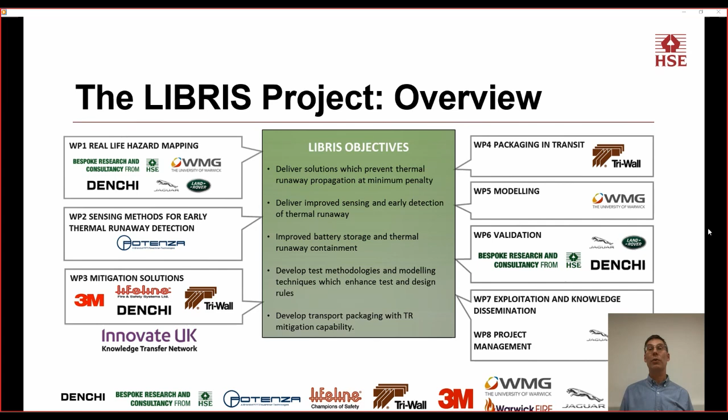And this all involved using the facilities and the skills that we have up here in Buxton, based on our large site, to do abuse testing of batteries. Now, abuse testing is where we're taking them beyond, in some way, what the manufacturer says that they are safe to do. So we're seeing what happens when you push those boundaries.

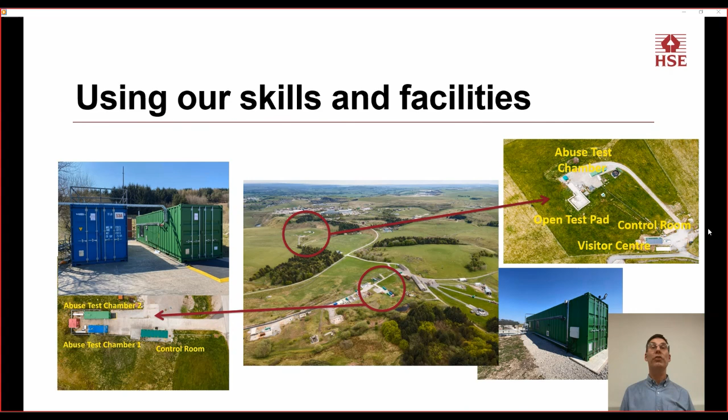So one example of the work we did within that project with a partner is with Tri-Wall, and Tri-Wall make packaging solutions, and they developed a battery packaging solution within the UK, and we did the testing of that, filling it up with batteries, setting the batteries in the appropriate way so they were going to fail, and showing that the packaging contained that event adequately.

Another example is working with Jaguar Land Rover as one of the vehicle manufacturers and designers in the UK. Now, nowadays with an electric vehicle, you do a test where you have to fail one of the cells in the vehicle and show what happens, show how the event is being controlled. And vehicle OEMs are working hard to control those events and to minimize the output and to stop it as early as they can.

So like all other partners, Jaguar Land Rover were working on that. They were developing some solutions. We were doing the testing of that to show that their solutions were making a real difference. And I haven't got time to go into the details of that, but yes, they did.

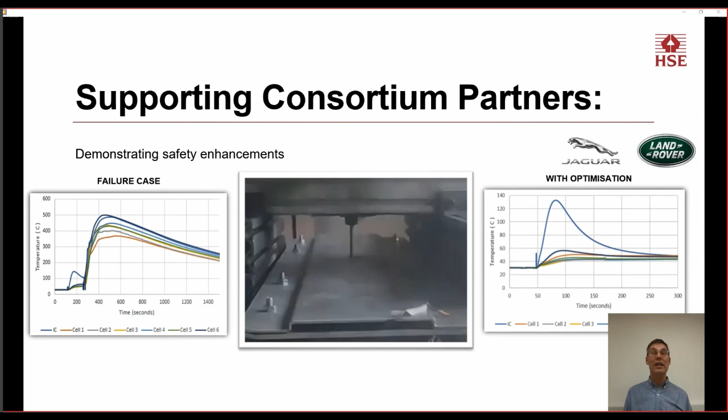And another example is looking at the data needed to do computational modeling. The modeling is only ever going to be as good as the data that feeds it, that generates it. So we were generating a lot of data and feeding that to a partner within the consortium who was doing that modeling. And there's just a few papers that come out of that.

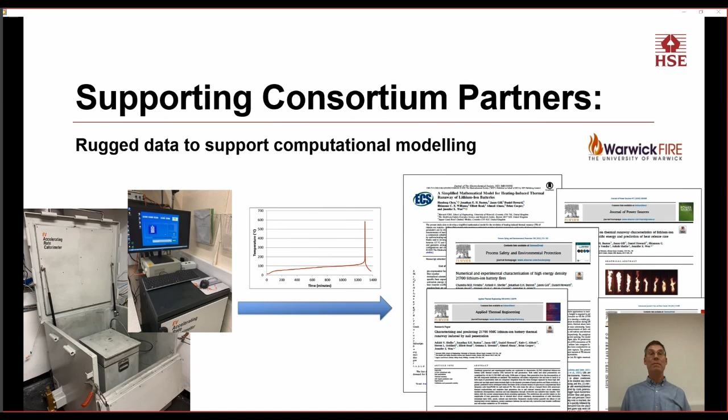Now, in addition to that work, we were doing some research that we were driving. One strand of that was looking at the gas coming off cells when they fail. So you see on the side of the picture there the rig in which we're generating that gas. That's a sealed system, and it's a system we could fill either with air or with nitrogen.

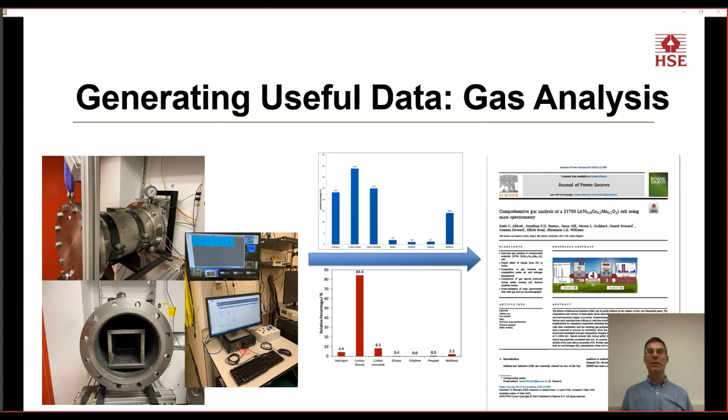So we're setting up and doing 2 sets of tests for everything, and you see the results in red there show you get one set of gas composition coming out when you run in air, and the results above in blue show you get a different set of gas composition coming out when you suppress the ability for the thing to catch fire. So those results have been put out, and if you're interested, you can find them in the paper that's referenced in the Science Review.

And another little bit of work we did looked at some of the projectiles that come out, and we'd noticed that on occasions when cells fail, or we caused cells to fail, they could fly off. That's an uncommon thing, but when they did, it could be quite vigorous. So we followed that through, and here's an example of what that looks like.

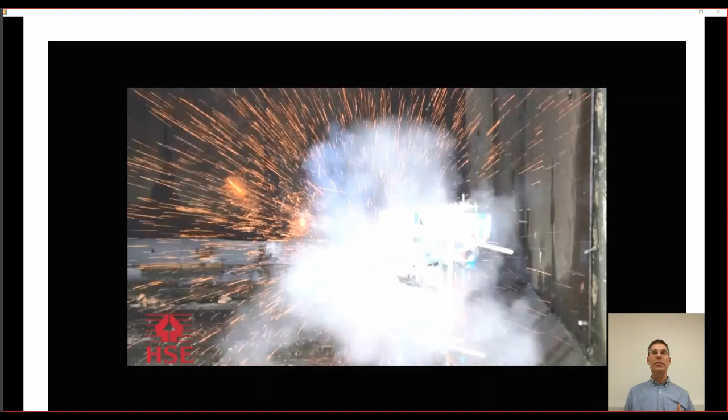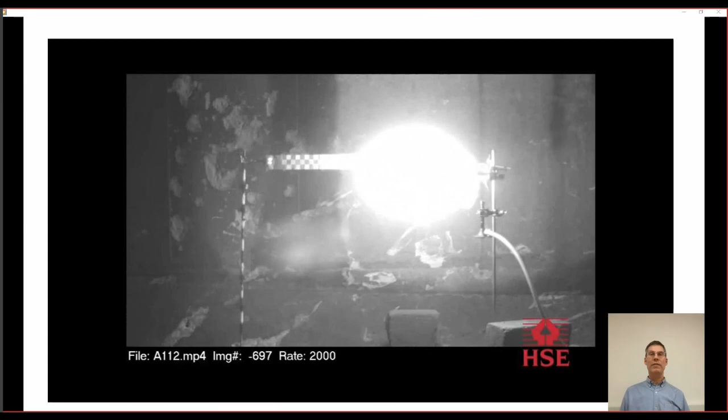Now we're deliberately putting the cell in a flame and holding it in a way that maximizes the chance of it flying, and showing that as a high-speed side-on image now. So this is a slow motion of the event that you've just seen, and you can see that the cell spins off on its axis. It's a bit like a Catherine wheel as it flies, and eventually hits the far end of the bunker and crumples.

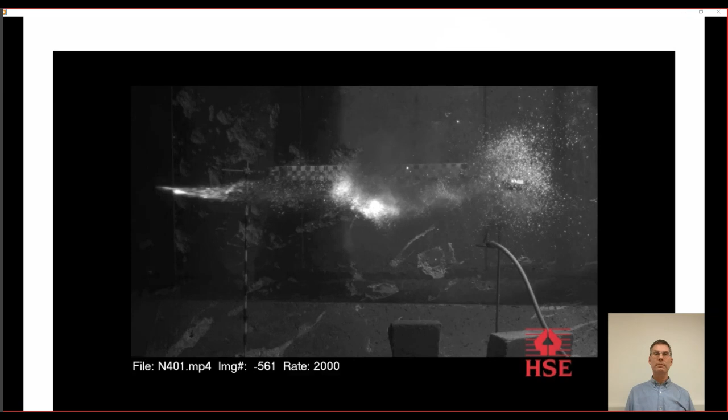Another similar example, but this time the cell flew straight and achieved far higher speed. And I think we clocked that one at just over 100 miles an hour. So it's a significant event.

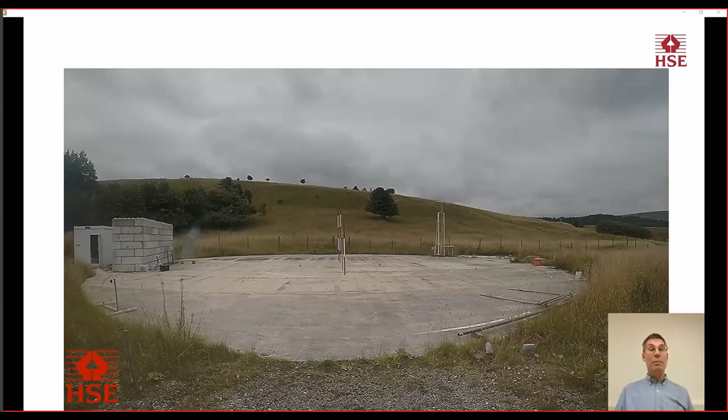And we took that to an open field to see how far these cells would fly. This is an example that is not quite so easy to see the cell flying. You see it's flying across the screen at the moment and just landing now. And we're seeing the cells were flying about 30 meters in that example. But this is early work, and we need to look into that a little bit more.

Thanks very much indeed, Jonathan, and some very visual demonstrations of some of the things that we're interested in exploring under this programme. We're now going to move on to Wayne Rattigan from our Explosive Atmospheres team in Science Division. And again, I think Wayne is going to be presenting via the medium of video. Hopefully we'll be able to see that video now. So Wayne, thanks for recording this for us. And if we can play that, that would be great. Thank you.

Good afternoon. My name is Wayne Rattigan, and I am a principal scientist working at HSE Science and Research Centre in Buxton. The work I'm presenting today is part of the HyTunnel project, whose principal aim was to provide an evidence base to underpin the safe utilisation of hydrogen vehicles inside tunnels and other confined spaces. The use of hydrogen as a fuel in the transport sector has the potential to contribute to delivering the UK's net zero targets. To ensure that current safety levels are maintained, it is important to have scientific evidence on the challenges posed by hydrogen fuel vehicles.

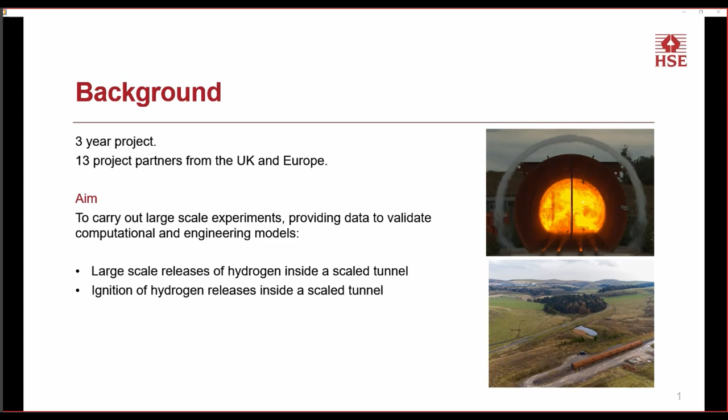The findings from the project are extensive, but here is a summary of a selection of the main findings from some of the work carried out by HSE. For the unignited releases, the extent of the flammable cloud inside the tunnel was dependent on the size of release and the rate at which it was released. For smaller releases, simulating those from a car, the size of the flammable cloud could be effectively reduced using ventilation rates inside the tunnel of around 3.5 meters per second. Where ignitions were attempted for these smaller releases, it proved difficult to ignite the predicted flammable cloud. In fact, for all the tests attempted, none were ignited.

For larger releases, simulating those from buses and trains, and where ignition did occur, the generated overpressure persisted for a long distance inside the tunnel, indicating that an equivalent event in a real-world tunnel would have significant hazard distances associated with it. And just before I move on to the next slide, I just want to show a video from one of the tests.

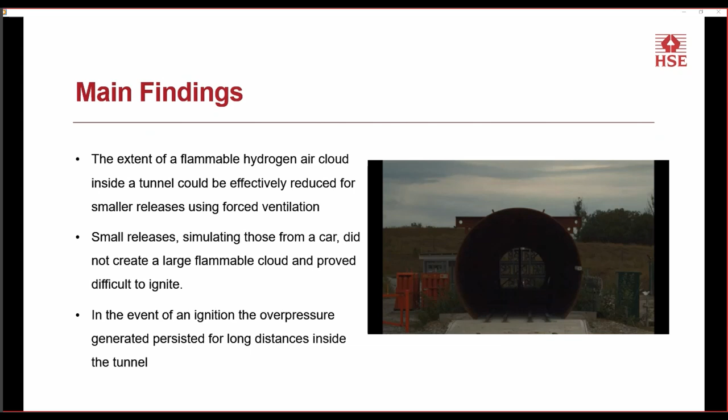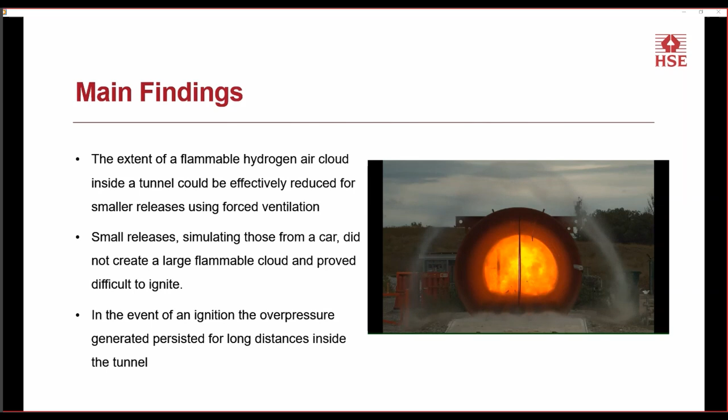This shows a release of hydrogen from the centre of the tunnel, which ignites, creating a fireball, and the pressure generated from the event causes what looks like a smoke ring at the mouth of the tunnel, but is actually water vapour condensing due to the pressure change. And this 10-second video clip was shot in high speed and actually equates to around 125 milliseconds in real time.

So, in summary, the findings of the HyTunnel project closed some knowledge gaps and will pave the way for the development of novel prevention and mitigation strategies by stakeholders following a safety by design approach. HSE carried out 57 experiments inside its tunnel facility, and the data produced, including videos from the experiments and other project partner experiments, is freely available for anyone interested on the Zenodo data hosting website. In total, there were 7 work packages, and the deliverable reports from each, including the 3 experimental work packages and the recommendations for the development of regulations, codes and standards, are freely available from the project website.

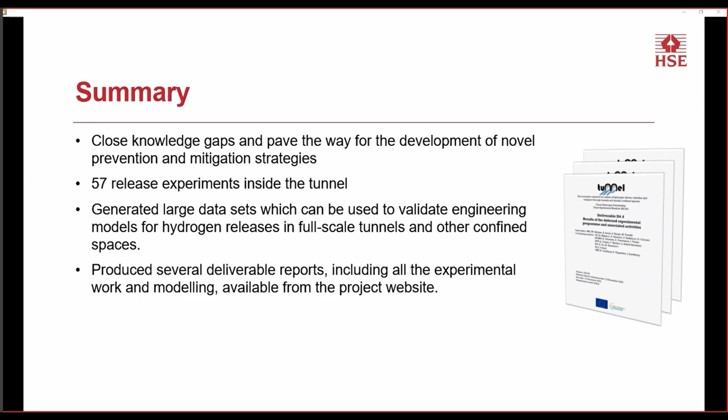So that was a couple of presentations around our strategic objective to support safe innovation in the delivery of net zero. We're going to move on now to some of the work that has been delivered to help reduce work-related ill health, starting with some work that Yi-Chin Chen will talk to us about, specifically around the national core study that we led, looking at the transmission of SARS-CoV-2 to support the UK response to the pandemic. So Yi-Chin, over to you.

Thank you very much. You're on mute, Yi-Chin, so you might want to. There we go. Perfect. Thank you, Andrew.

I'm principal epidemiologist from HSE. Within PROTECT COVID-19 National Core Study, I led outbreak investigations. Today, I'm going to present our work as a way to highlight the research and legacy of PROTECT.

PROTECT is a strategic national program of work that informs policy and operations to support immediate pandemic response, as well as for future preparedness. PROTECT has 6 themes led by HSE Chief Scientific Advisor, Professor Andrew Curran, and delivered by more than 200 researchers from 16 institutions across the UK, including HSE.

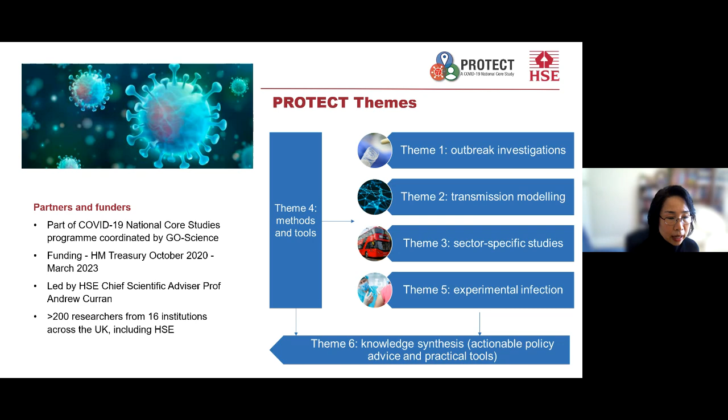HSE led Theme 1, the workplace outbreak investigations, to understand risk factors for outbreaks, control measures, as well as their effectiveness. We brought together very quickly more than 45 scientists from 5 institutions to deliver a very large program of work, including rapid on-the-ground investigations of 20 outbreak sites and comprehensive analysis of national outbreak data. The level of collaborations and data sharing were unseen before the pandemic.

The analysis of national outbreak data has consistently identified high-risk sectors, including education, health, public services, food manufacturing, and warehousing. Our systematic literature review has shown a complex interplay of risk factors contributed to workplace outbreaks, and this was backed by our own outbreak studies. The analysis of a large linked data set has shown that people living in deprived areas, traveling to work as a passenger, and working in close proximity with others were associated with increased risk of workplace outbreak, while having vaccination and permanent contracts reduced the risk.

Our on-the-ground investigation has shown it was challenging to maintain physical distancing all the time. People didn't understand ventilation, and we frequently found poorly ventilated areas. The overall level of surface contamination was low. But every outbreak site was different, and it is important to carry out site-specific risk assessments and to implement multi-layer control measures. We were able to be innovative.

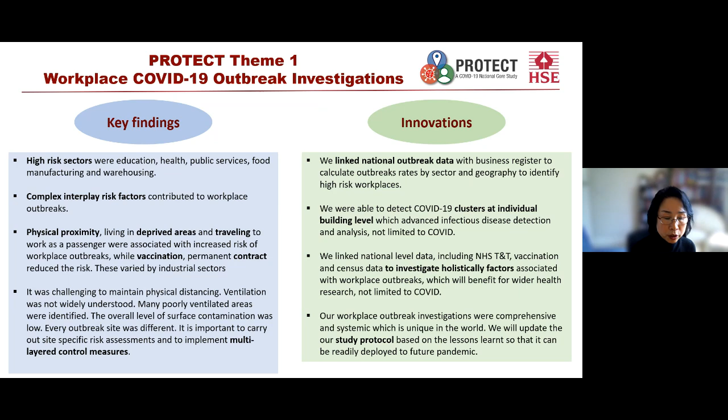Our workplace outbreak investigation is comprehensive and systematic, which is quite unique in the world. We're going to update our study protocol based on the lessons learned, so it can be readily deployed for future pandemics. Our work has contributed to the global evidence of virus transmission and control in the workplace. The new way of working and methods developed can be applied to wider workplace health research. It also highlights one of the key PROTECT legacies, which is to provide the UK with the capability for rapid response to future pandemic threats. Thank you.

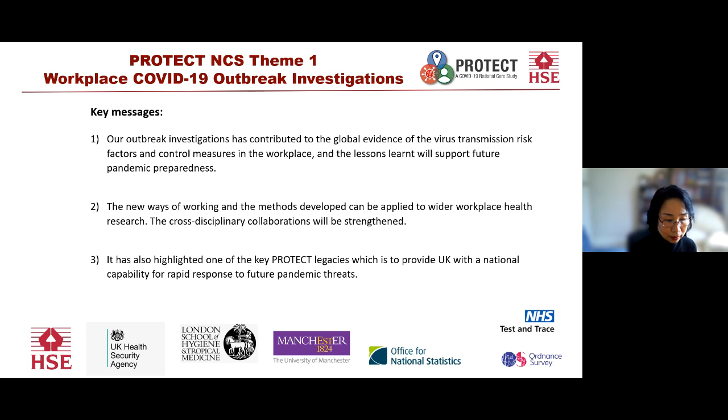Thank you very much indeed, I-Chin. Really, really important work, and great to see this moving out into the post-COVID world. Moving on to a second COVID-related presentation now from Claire Bailey, who's going to tell us about how some of the decontamination interventions might help to control transmission both of SARS-CoV-2 and possibly for future pandemics as well. So Claire, thank you very much, and over to you.

Can everybody hear me now? Okay, can you see the slides, Claire? Yes, I can. Can everybody hear me? Yeah, you might want to move your microphone a little closer, but yeah, looks good.

Okay, well, hello everybody. I'm going to talk about the modern decontamination interventions that may help to control SARS-CoV-2 transmission. In particular, I'm going to talk about air cleaners. So if we move to the next slide, there we go. So during this study, there was a lot of talk about using air cleaners to improve ventilation systems, but there was a lack of consistent information regarding the ability of air cleaning technologies to actually remove bioaerosols. And we wanted to look at a couple of different types of air cleaners in a side-by-side comparison, so you can see how effective each one really is compared to another.

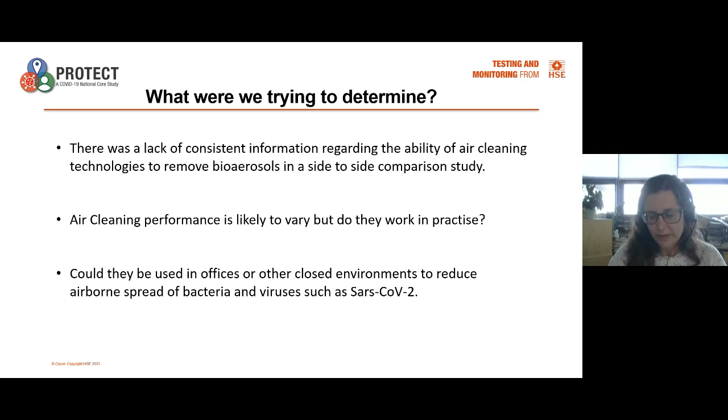We appreciate that air cleaning performance is likely to vary, but the question is, do they actually work in practice, and could they be used in offices or other closed environments to reduce airborne spread of bacteria and viruses such as SARS-CoV-2? So within the study, we looked at 5 air cleaning devices. Now these come in a variety of shapes and sizes, and also a variety of costs, from quite cheap to very expensive. We picked 5. And we tried to get a selection of what's commercially available, right through from the plug-in devices that you buy off the shelf to more bespoke ones that are designed to be electrically wired into ventilation and aircon systems.

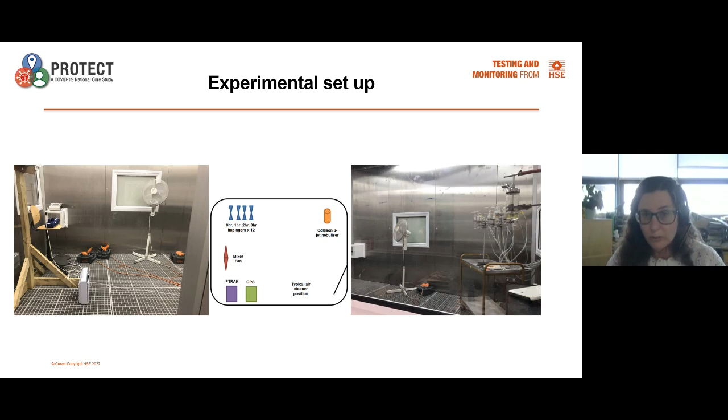But over a 3-hour period, once the room was filled and sealed, we took air samples at the 1-hour, 2-hour, and 3-hour periods. We also measured particle sizes, both small and large, to see if the air cleaners were working and were reducing the viral load within the room.

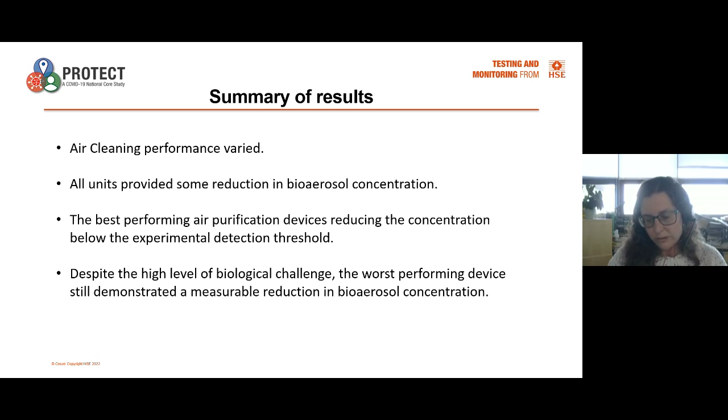So how did they do? All the air cleaners reduced the viral concentration, bioaerosol concentration within the room. The performance did vary, with the best performing air purification device reducing the concentration below the experimental detection threshold within quite a short space of time. The final challenge that we gave it was extremely high, and we showed that even the worst performing device still demonstrated a measurable reduction in bioaerosol concentration over the 3-hour period.

So what does that mean? In real world scenarios, even the worst performing device could potentially help mitigate or reduce bioaerosol spread and offer benefits for reducing airborne spread of viruses such as SARS-CoV-2.

I'd also like to mention that although this work was done under the NCS Protect research project, it also builds on work HSE have previously done looking at air cleaners to remove other airborne particulates such as diesel fumes, and I think that this work plus the work we've done previously suggests that air cleaners do have quite a wide potential to improve building air quality and protect workers.

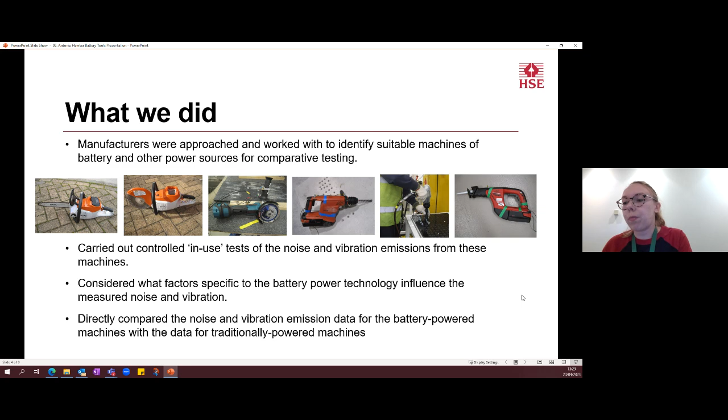We also considered what factors specific to battery power technology could influence the measured noise and vibration. For example, what happens to the power of the tool when the battery begins to discharge. We then directly compared the noise and vibration emission data for the battery-powered machines with the data for traditionally powered machines. So the positive findings. The sample battery-powered chainsaws, reciprocating saws, and drills when used drilling into metal consistently produced lower in-use noise and vibration levels than the sample equivalent petrol or mains-powered machines. Additionally, the in-use values were similar to the manufacturer's declared values in instruction manuals.

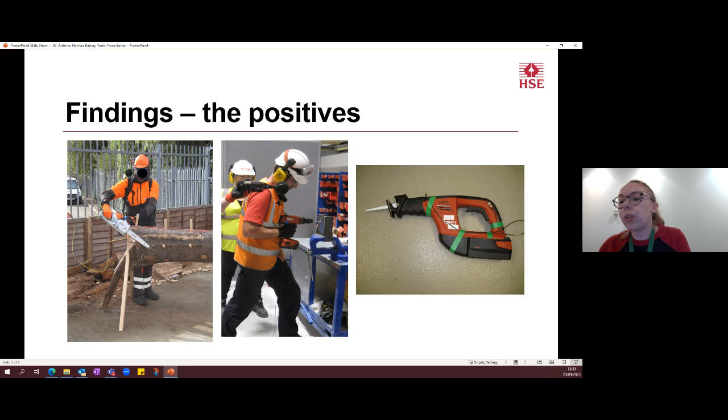For all other machine comparisons, there were factors other than the power source which could dominate differences in noise and vibration emissions. There was no assured reduction in noise or vibration from choosing battery-powered over traditionally powered machines. The battery-powered tools may therefore be lower in noise or vibration for some activities undertaken, but the traditionally powered tools could be lower in emissions for other activities.

Similarly, the choice of consumables, such as the wheel or drill bit used, can have a greater influence on emission than the power source. For example, with angle grinders, the mounting of the wheels and the consistency in the makeup of the wheels influence noise and/or vibration emissions.

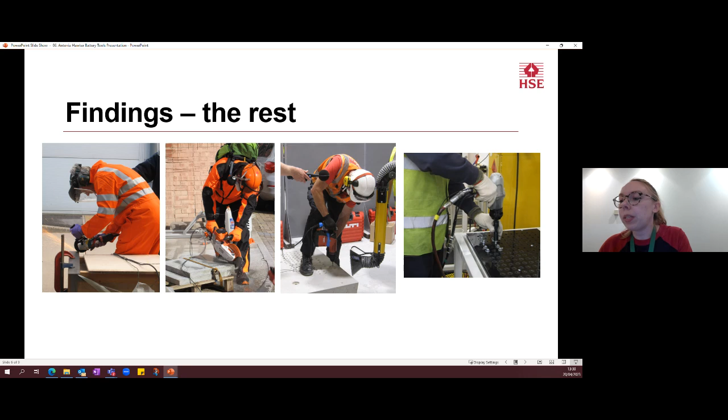In-use testing also showed significant differences between emission values declared in instruction manuals and those measured during use. What is very important to note is that these are the findings for these particular makes and models and may not be consistent for all models.

So, take-home messages. Battery-powered tools cannot be considered lower in noise and vibration emission for all tools. There are factors other than the power source which could dominate differences in noise and vibration emissions. There was no assured reduction in noise or vibration from choosing battery-powered over traditionally powered machines. It is important that duty holders identify efficient tools that are appropriate for the job regardless of the power source, avoiding any high noise or vibration models, and then manage the remaining noise or vibration risk.

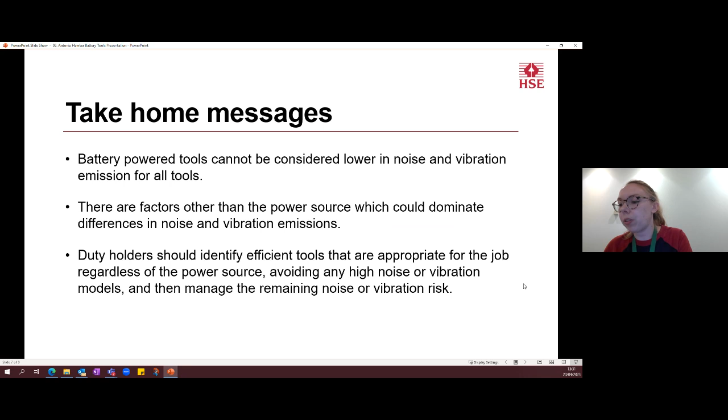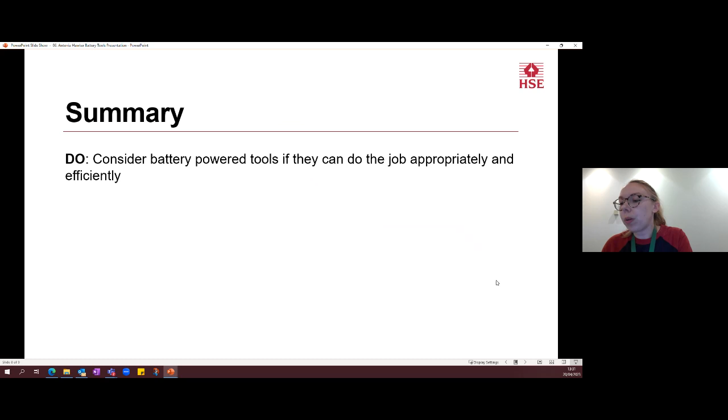So in summary: do consider battery-powered tools if they can do the job appropriately and efficiently. Do look at noise and vibration emission levels stated in the instruction manuals, but treat them with some caution. Do not assume that battery-powered tools will be lower in noise and vibration emission for all tools. Thank you for listening.

Thanks very much indeed, Antonia. Really interesting and helpful advice there.

Okay, we're going to move into another area of our strategy now, which is making sure we increase and maintain trust to ensure people feel safe where they live, where they work and in their environment. And it's a great pleasure to welcome Bryn Bircher from our Chemicals Regulation Division to tell us about some work being done to look at the use of drones to assess pesticide applications. So Bryn, thank you very much for joining us, and over to you.

Thank you very much, Andrew. Where are we? There. Thank you very much, Andrew.

My presentation is about the authorisation of the first UK application of pesticide using a drone. It's a team effort from people in Health and Safety Executive's Chemicals Regulation Division. The application of pesticides by drone, or remotely piloted aircraft systems, has generated a lot of interest over the last five years. The interest has come from CRD's usual stakeholders - chemical companies, farmers and growers - but interest has also come from a new set of stakeholders: drone operating companies who see the ability to apply pesticides by drone as a new business opportunity.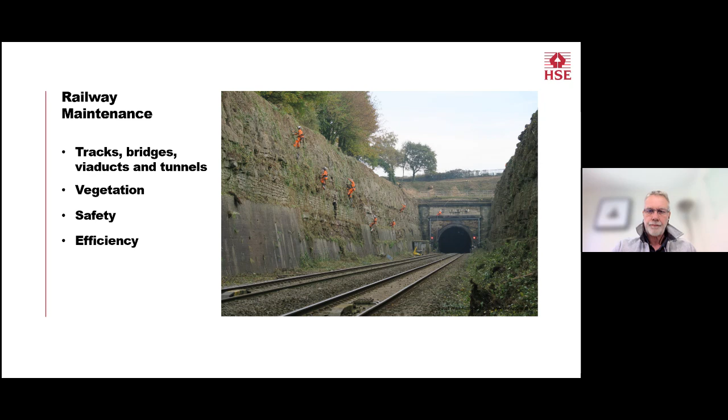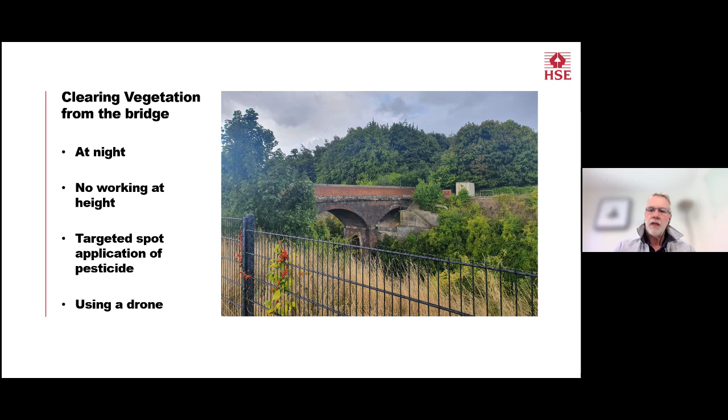For a number of years, Railscape have been developing a method of applying herbicides to railway infrastructure whilst removing the risks of working at height in the dark using artificial lighting in a restrictive area. Working on the railway is often limited to short periods of time when the track is closed, adding additional pressures to work efficiently.

Railscape understand the challenges of working on the railway. They partnered with a drone company and approached HSE CRD to discuss the possibility of applying pesticides using a drone. Drones were already on our radar when we were approached, and we were keen to support this activity.

CRD specialist scientists provided detailed advice and guidance on the data that would be required for later evaluation. The Railscape engineers designed, developed and tested a fully functional method of applying liquids in a precision manner to vegetation at height or in difficult to access areas.

Railscape introduced CRD to Harper Adams University so HSE specialist scientists could provide the necessary advice and guidance to the university before they started carrying out the trials to produce the data that would support the application to apply a herbicide using a drone. HSE specialist scientists also provided extensive support to Harper Adams University to ensure that the data being collected was sufficient for regulatory purposes.

Once the trials were complete and the data were provided for application for authorisation, specialist scientists carried out a full regulatory evaluation to confirm the risks of spraying pesticides from the Railscape drone was within the limits set for other application equipment. The CRD evaluation established that herbicides can be applied using remotely piloted aerial systems, or drones, directly to the target plant without the requirement for rope access or height access equipment.

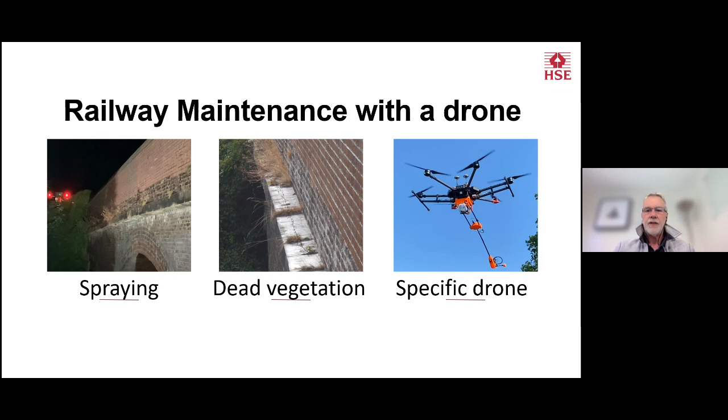The spraying operations were carried out during the night towards the end of the summer in 2022. A follow-up visit showed that the spraying operation had been successful and that the vegetation was drying off.

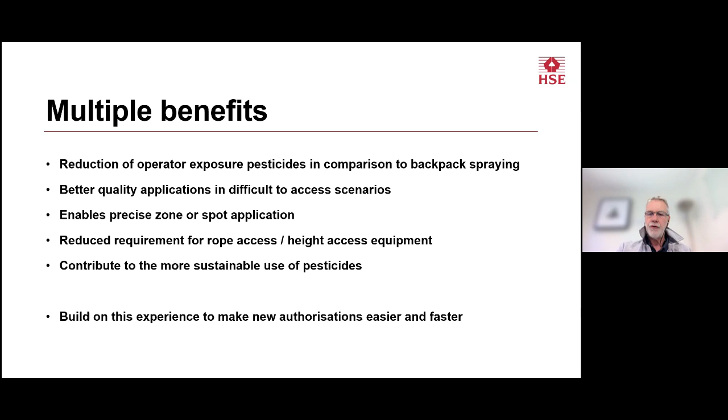In addition to the obvious safety advantages and risk removal the new application method presents, the operation is precise in targeting, precise in delivery, and will use considerably less pesticide with less risk of spillage. The work resulted in the first authorization for an application of a herbicide by drone in the UK. CRD will build on this information and experience gathered from the evaluation of this application to support additional UK and international work to make the application of pesticide by drones more commonplace.

Thank you very much for your attention.

Thanks very much indeed, Bryn. Really interesting and novel application of drone technologies. Let's move on to Mike Hemingway, and Mike's going to talk to us about some work we've been doing, and again the strategic objective to maintain GB's record as one of the safest countries to work in.

Mike's going to talk about some investigation work that we've been doing to understand the sad and upsetting fatal consequences of the misuse of a flammable gas monitor. So Mike, over to you.

Thank you. Hello, everybody. Thank you, Andrew. Yes, I'm going to be talking about HSE's investigation into the fatal consequences of the misuse of a flammable gas monitor.

Back in 2018, there was an explosion at Briar Chemicals that killed a welder who was carrying out maintenance work on a mixing vessel. The mixing vessel was supposed to have been emptied, but a fault in the system allowed toluene to leak into the vessel.

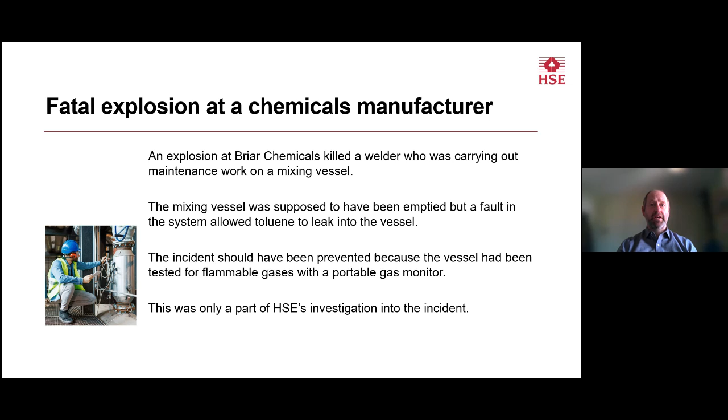The incident should have been prevented because the vessel had previously been tested by flammable gas monitors, which unfortunately didn't pick up the toluene vapour inside the vessels. The investigating inspectors wanted to understand why the gas monitor didn't successfully measure the flammable gas. This was only a small part of the total HSE's investigation into the whole incident.

So the objectives, as far as we were concerned, was to determine the settings and the conditions of the gas monitor on the day of the incident, to use these settings to test the various monitors in the laboratory against known concentrations of toluene gas.

This is a picture of the actual gas monitor that was involved in the situation. It's a fairly standard personal gas monitor that can monitor oxygen, carbon monoxide, hydrogen sulfide, and of course, flammable gases. The sensors are within the main body of the monitor, and there's a small pump which can draw air through a sampling tube, which can be placed into a vessel or other areas of interest to draw a sample.

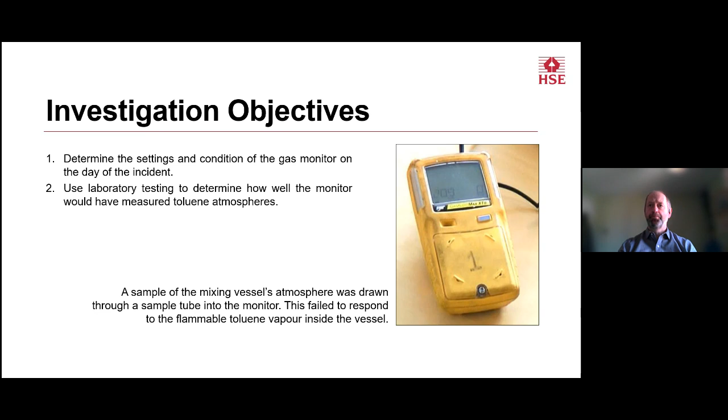So the main findings: the wrong sampling tube material was used, which slowed the toluene reaching the gas monitor. Specifically, the gas monitor would take 7 minutes to alarm on exposure to toluene, but less than 2 seconds on exposure to methane. This is because toluene is effectively a sticky chemical that is readily absorbed onto the inside surface of the sampling tube. Once a coat of toluene had been built up on the inside surface, the toluene could then break through to the gas sensor.

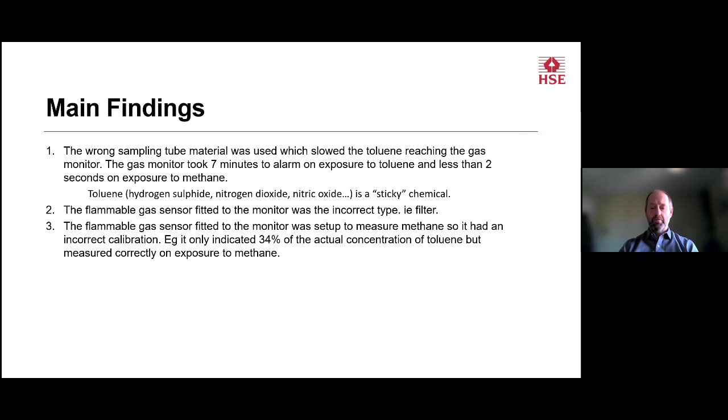The results of the work was a successful prosecution of Briar Chemicals. We also had an HSE safety alert issued, which will help to prevent this happening again in the future.

The take-home lessons are that gas detection is not always simple. If you have a safety critical need for gas detection, you need to educate yourself, and most importantly of all, bump test. What this means is just do a performance test of the gas monitor to make sure it's working every time you need it.

If the users of the gas monitor had just inserted the end of the sampling tube into the headspace of a jar of toluene, for example, this would have shown no response on the gas monitor, and they would have known there would have been a problem.

And that's the end of my presentation. Thank you. Thanks very much indeed, Mike. Some important learning from that very sad and tragic incident, and yes, lots to think about there.